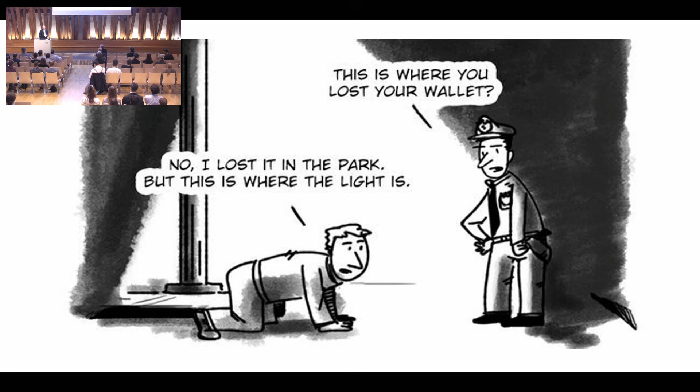And so, here's another cartoon. I'm looking for my quarter I dropped. Did you drop it here? No, I dropped it 2 blocks down the street. Why are you looking for it here? Because the light is better here. And so the architects, engineers, and geometers have different street lights. And I wish I could see what you guys see, and I want you to see what I see. And somehow can we get these knowledge bases closer to each other?

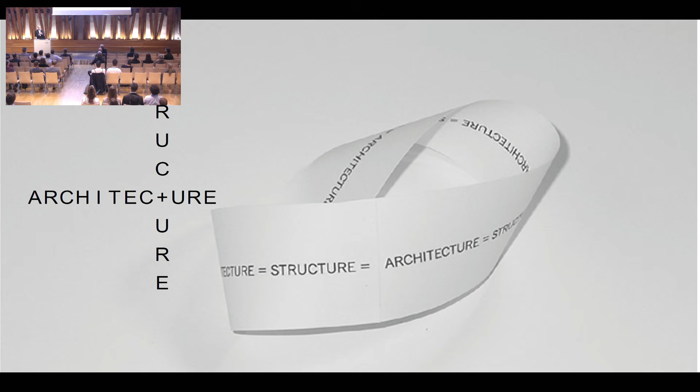Now, let me talk about structure and architecture. In fact, this room, if someone asked you to describe the architecture, you would describe the structure. If someone asked you to describe the structure of this room, you would have described the architecture. They're inseparable. And it's like a Mobius strip, another geometric form. You start on one side and you end up on the other. Architecture, structure, one would hope that they would go together. They don't always, but one would hope they would.

The building that I showed earlier, you cannot describe the structure without describing the architecture. They're integral. There's a building I did a long time ago in London. If you ever take a train out of Liverpool Street Station going up to Cambridge, you go under this building. It's a building that's a bridge because it's going over a train yard that's underneath.

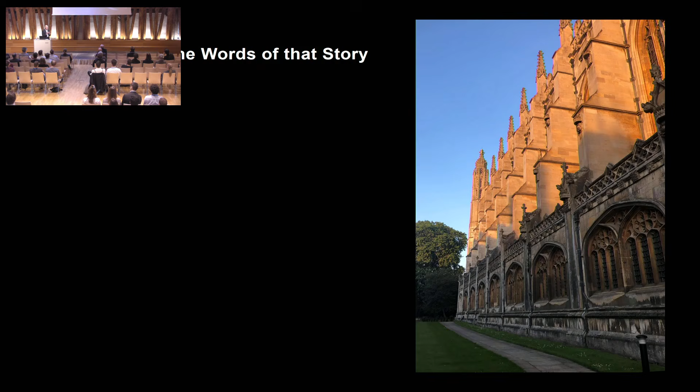Now, architecture is a story of a place and time, like this room we're in right now, or the chapel at King's College in Cambridge. So architecture tells the story of a time and place, but structure forms the words of the story. Here it's the flying buttresses, or this incredible fan vault that's in the chapel, that's held together by geometry. There is no reinforcement, there's no rebar, this is all just stone. The only reason it does not fall down is that it has the right geometry.

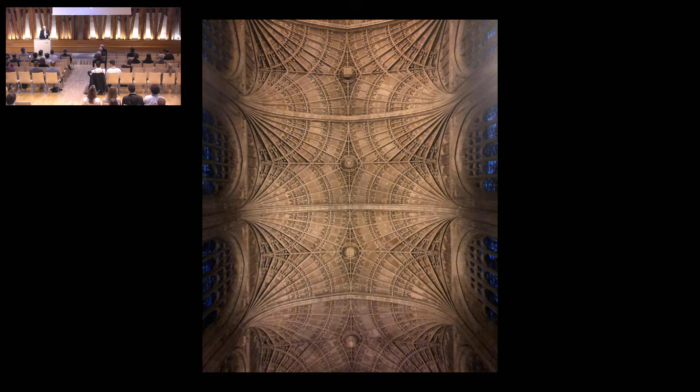And in some places it's only 100 millimeters thick, held together by geometry and gravity. And I challenge most structural engineers today to be able to design this that was done 500 years ago, because we don't know enough about geometry.

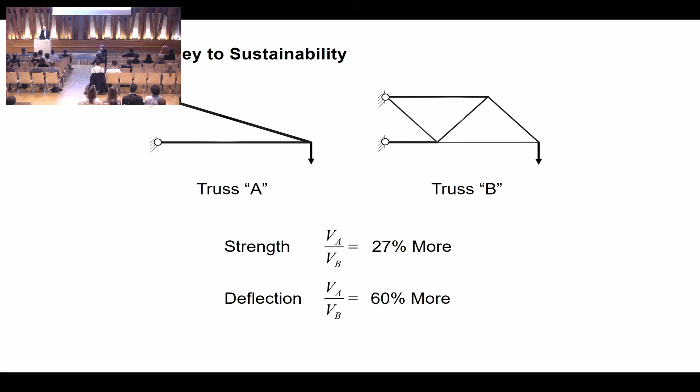Now, we're in the middle of this terrible climate crisis, and everything we build today delivers carbon to the atmosphere now. And in a new building, the embodied carbon is primarily structure. If you count the substructure and the superstructure, it's way up there, close to two-thirds of the carbon on a building on day one comes from structure. So we should get some very, very efficient structures when we build new buildings.

Okay, I'm going to use a little terminology. In the office, as Helmut says, we have our research group. And our research group is not a standalone research group. They are all people, architects and engineers, who work on projects as their day job. And then after hours, we think about things we don't know and do research. And it's so much more efficient to have the research done by people who are actually working on projects, because they will find applications that you never imagined.

Most of our research is totally blue sky. We generally do not have any idea what we're going to do with the knowledge we're looking for, but we will find applications because we are designers. And one of the things that happened early on is we would talk to each other and we didn't understand, because we were using the same word to mean different things. So I'm going to give a little terminology that we use in the office, and it may not be right for you guys, but okay.

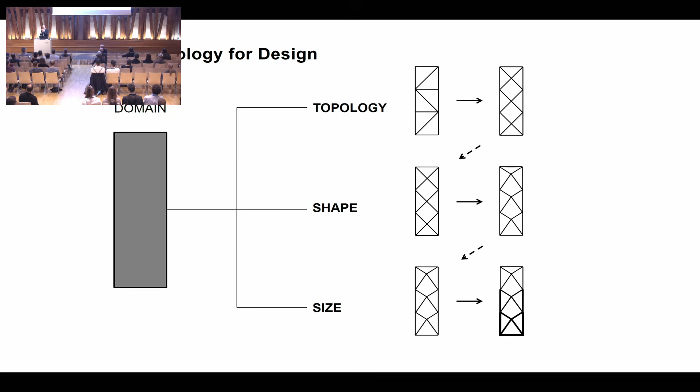You know that structure I showed you just a minute ago, the A and B? I don't care how good you're going to be at sizing the members or the connections, you cannot get beyond a bad geometry. And so the most important parameters are topology and shape, which is architecture. So the architects and geometers need to be involved in the creation of topology and shape.

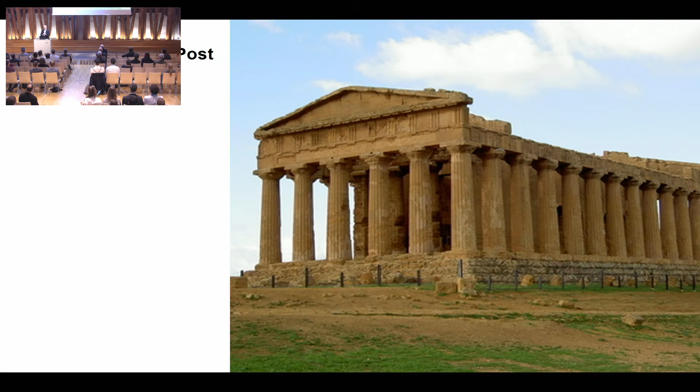And over time, structural technology leads to new architecture. So can we do what people have done in the past? If you go back to the Mayans, they had a very limited structural technology. They had the corbel arch. Well, guess what? Their architecture was pretty limited. The Greeks had a very limited vocabulary. They did really well with just a beam and post, a pretty remarkable architecture for a very limited vocabulary.

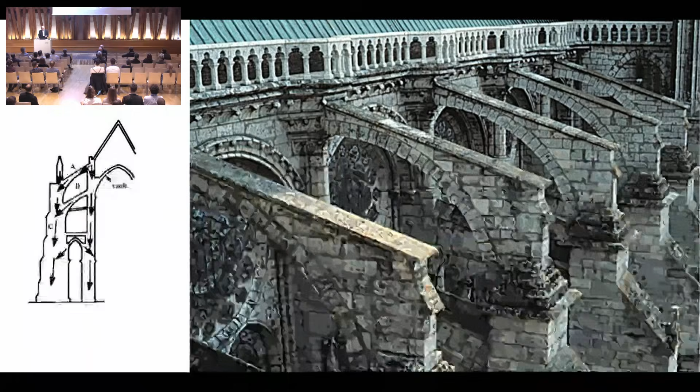The Romans, of course, brought in a richer structural vocabulary in the form of arches and domes, which created the opportunities for new and better architecture. The Gothic era was a highlight period of structure and architecture and geometry coming together. The thrust of that building has to be in the masonry, or the masonry would fall down. It cannot be anywhere else.

Now you go into the beginning of the modern era when metals came along, and you have the work of Thomas Telford in the early 19th century, or Brunel towards the middle of the 19th century, or towards the end of that 19th century, the work of Guastavino and others who created these incredible vaults that are just purely very efficient compression structures created by their own geometry.

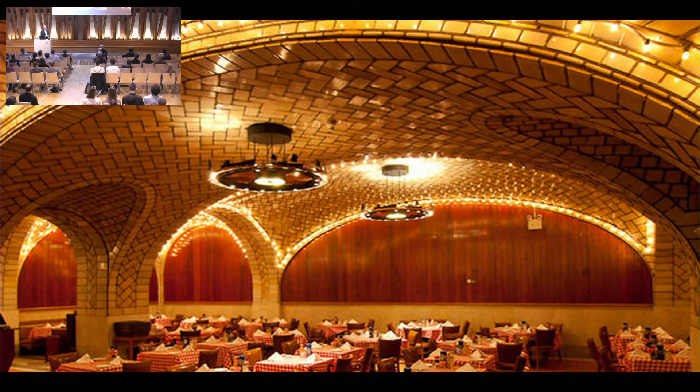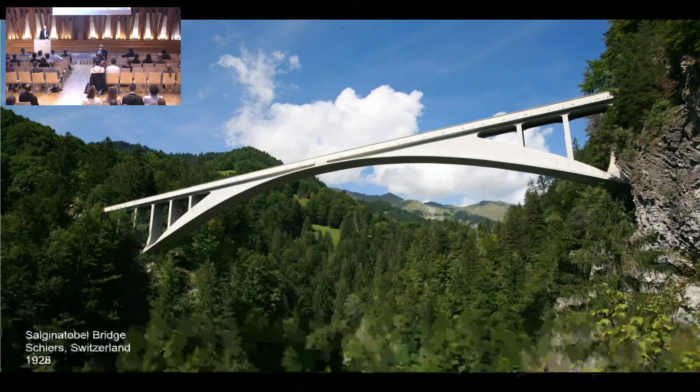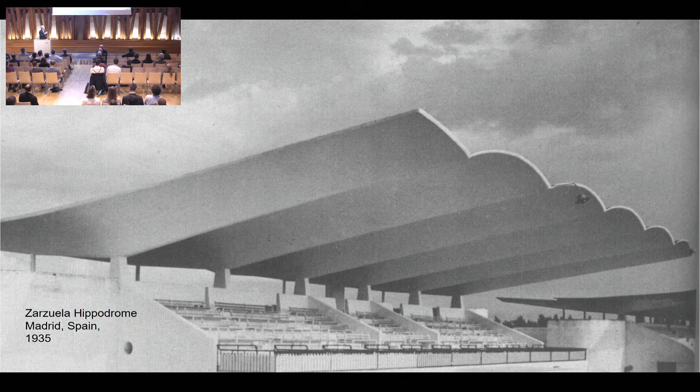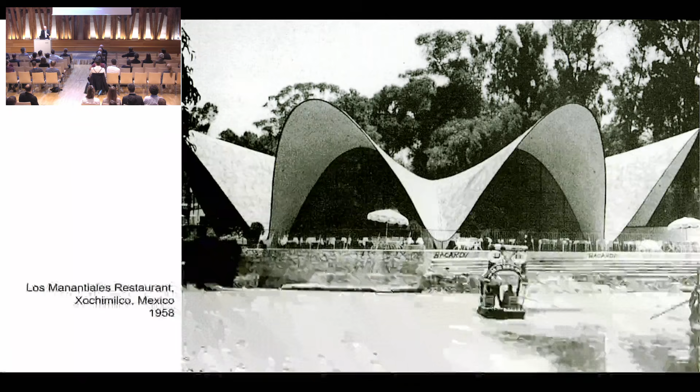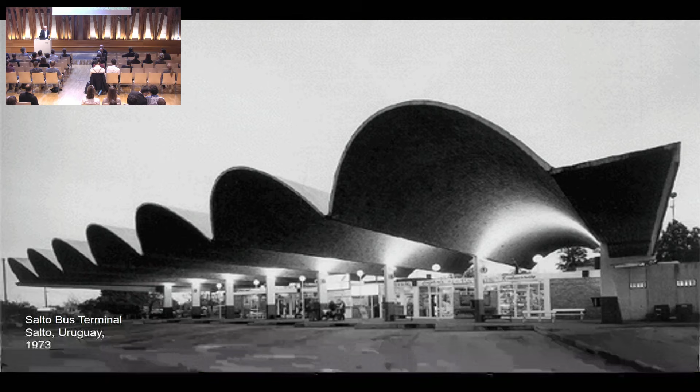Or Felix Candela, who did amazing things with a very limited vocabulary of hyperbolic paraboloids. That's incredible. Look how beautiful and slender that is from this hyperbolic paraboloid. Or Bucky Fuller with his geodesic domes. Heinz Isler with his free-form shell structures formed by hanging burlap and hanging fabric and seeing what the shape is. Or Dieste, this is a bus terminal in Uruguay. It's brick. That is brick that he post-tensioned together.

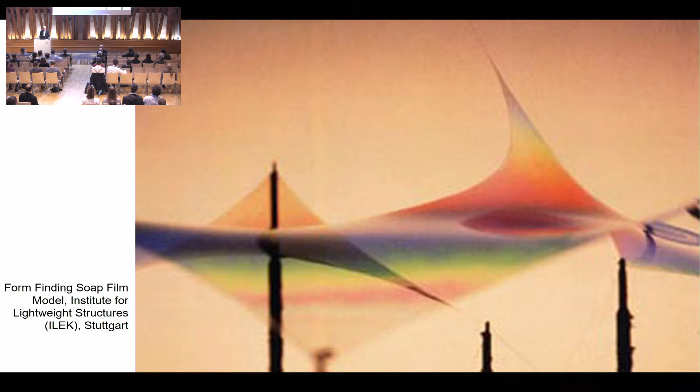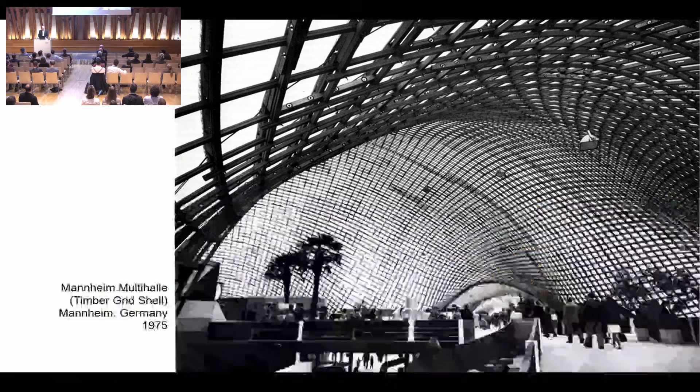Quite remarkable. Of course, the work of Frei Otto with his research down in Stuttgart, with soap films and other materials that led to the incredible new architecture of the Olympic Stadium or the Multihalle in Mannheim. Incredible structures.

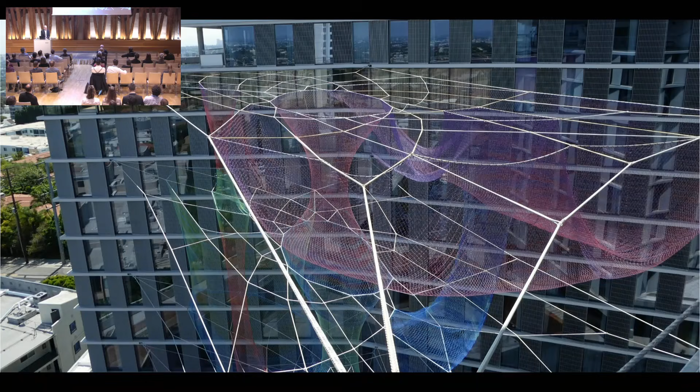Here's an artist that I work with quite a bit now. Her name is Janet Echelman, and this is an art piece we did in West Hollywood, California. And you look at that geometry, and even more so than the masonry, where is the force? It has to be in the rope. And for every node there that you see with your eyes of the ropes coming together, there's an invisible but equally real polygon of forces that are closing for it to be in equilibrium. And so that brings me to the geometry of equilibrium, a very, very important topic. All of these things I've showed you are based on the geometry of equilibrium.

And a very important contributor to this conversation was James Clerk Maxwell. Now, Maxwell is most famous for his work in electromagnetic theory. When Einstein first went to England, they asked him, did you stand on the shoulders of Newton? He said, no, I stood on the shoulders of Maxwell. But he also did some very important work in engineering mechanics, or essentially structural engineering. And he's responsible for something called reciprocal figures and graphic statics.

Here is his paper from 1864. The title is On Reciprocal Figures and Diagrams of Forces. Okay? And he talks about what is a reciprocal figure. Reciprocal figures are such that the properties of the first relative to the second are the same as those of the second relative to the first. Okay, now we're going to get into the stuff that I had no idea what he was saying initially. Thus, inverse figures and polar reciprocals are instances of two different kinds of reciprocity. I had no idea what a polar reciprocal was when I first read this.

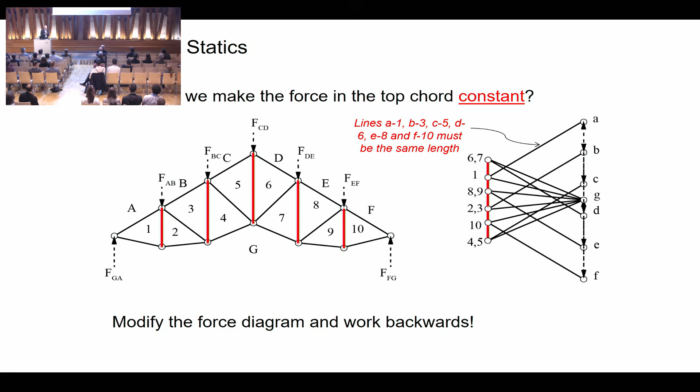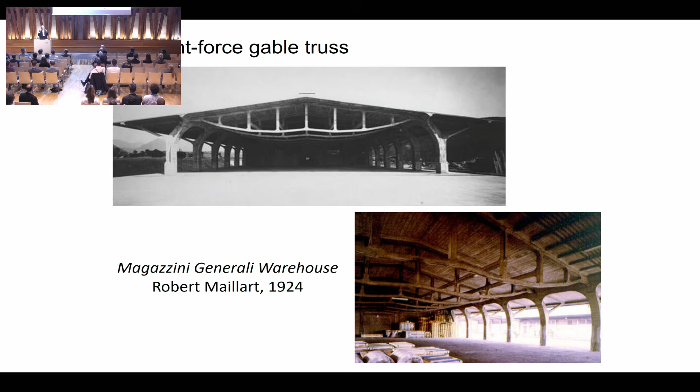Well, obviously you have to change the rest of the geometry to make this true. So you complete the geometry. Ta-da. You now have a structure where all of the forces in the top chord are equal. That looks a little unusual, right? Well, guess what? Maillart did it about 98 years ago, down in Switzerland. He designed this so that roof beam had a constant force. And you see that in the architecture.

Now, let me talk a little bit about the geometry of efficiency, something called Michell trusses. Once again, I was not educated in what a Michell truss is. I was at a conference once in Belgium, and one of the presenters says, this is like a Michell truss. I'm a structural engineer, I'm a partner in a big firm. I don't know what a Michell truss is. So when I got back to the office, I had the librarian find Michell's original paper.

And here is Michell. He was an engineer, mathematician. He was educated at Cambridge University, but he practiced in Australia. And he wrote an important paper in 1904, called The Limits of Economy of Material in Frame Structures, which means trusses. He developed geometries that would lead to structures of maximum stiffness or minimum volume for a given stiffness. And the first word of his paper is Maxwell.

And the first equation is the Maxwell load path theorem, which could be an entirely separate lecture. It's become one of my two most favorite design tools. My two most favorite design tools are virtual work and the Maxwell load path theorem.

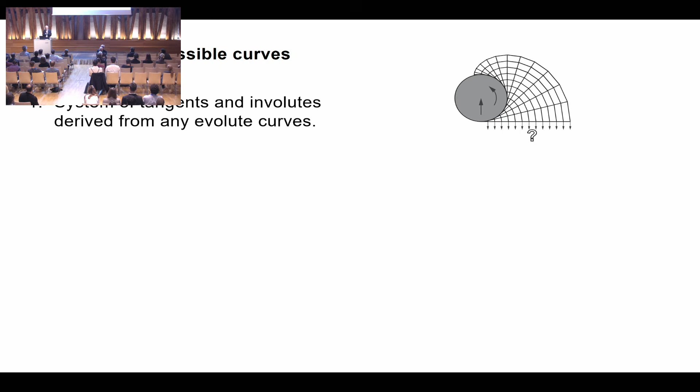And if you look at Mohr's circle, that tells you they should be 90 degrees to each other. And so you end up with these fields of 90-degree curves. Another one he comes up with is the logarithmic spiral. Now, what's interesting to me is geometrically, Michell implies that he feels that this is the most general geometry because by playing with the equiangular spiral or logarithmic spiral, you can go to polar coordinates, or if you zoom in on one of the nodes, locally it looks like rectangular coordinates.

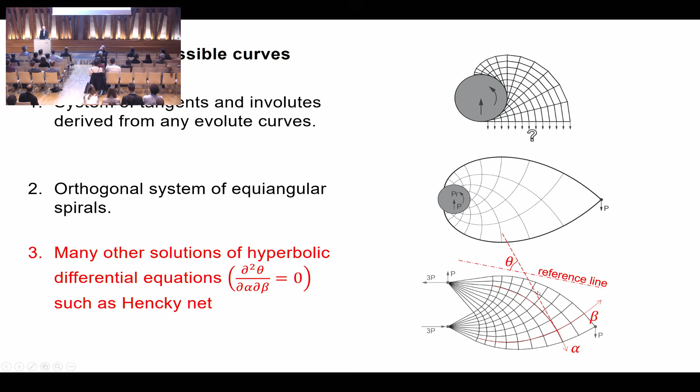Or these things called Hencky nets, which basically is saying that this cross partial derivative of the change in the angle to a reference line going in one direction and then back to the other direction is equal to 0. And this is very, very important. And it led to the following structures. These are Michell's trusses. These are structures of least volume.

The one on the left, if you have a semi-infinite space where you can only have structure below the line, you can't have structure above the line. So here's a downward force, and the reaction upward. You will notice that the force in this rim, this thing that looks like half a bicycle wheel, never changes. This compression member is always orthogonal to the tension members, and all the tension members are turning the load. And so what I think nature, because this is physics, is trying to tell us is that nature likes to turn loads gently.

Let's look at this odd-looking cantilever structure here, where there's a circular support here in the middle. There's an applied load out here, and you have these logarithmic spirals. And you'll notice that the force in this chord never changes all the way to the support. Nature is turning the load gently.

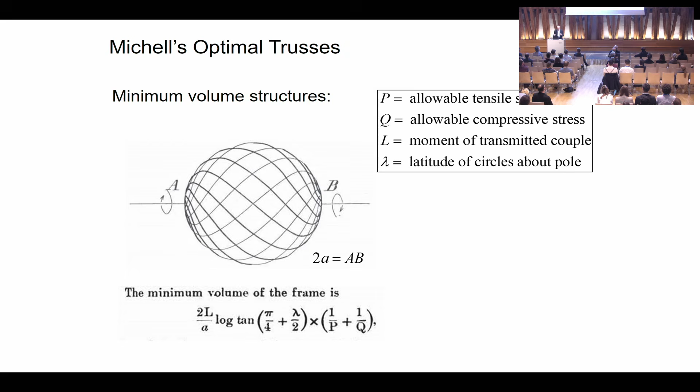So in architecture geometry, you tend to see these three primal geometries. You tend to see orthogonal tension and compression fields, or polar, or logarithmic spirals, or combinations of those. So here is a combination of orthogonal and polar that are minimum load path structures.

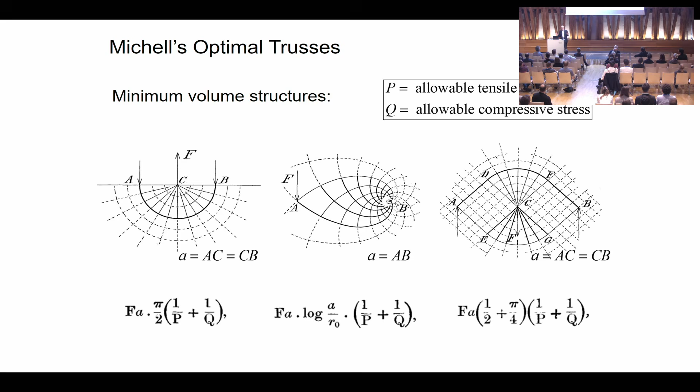Now, one of the things I want to point out here: in this structure, there are an infinite number of spokes. In this structure here, there's an infinite number of members in there. Well, it's pretty hard to specify that on a drawing, okay? I want an infinite number of spokes, okay? So we live in the world of discrete, and so we've been doing a lot of research into something we call discrete optimal trusses. One of the engineers in the office, Arek Mazurek, did this research.

So here we have this truss, which has a geometry somewhat like the Michell truss, and it has a certain span, x. We're going to keep it symmetrical, so we know y1 is 0. You're not going to move these nodes. Y3 is going to be 0 because we're going to keep it symmetric. And x3, well, we fix the length. But this node can move in the X or Y direction. So we only have 3 variables to find the geometry.

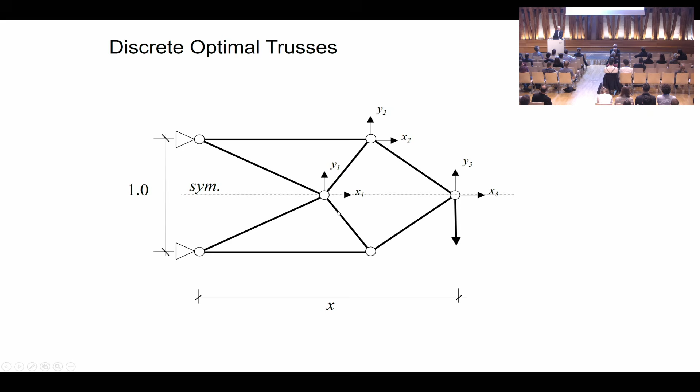And remember how I said that the compression member and the tension members want to intersect at 90 degrees? Well, you can do that if you have an infinite number of members, but if you have only a limited number, how's it going to work? So our first guess was that this member would bisect these two, but guess what? We were wrong, okay? And I'm going to show you his research.

Look at the geometry. There's going to be some instability at the beginning because there's actually a better geometry, but at a certain point it'll stabilize, and then as it goes to different lengths, look at the geometry and see if you can figure out what the rules are. There are certain geometric rules that nature is trying to tell us. Certain geometric relationships.

And what Arik observed is this: that nature keeps one of the angles at 90 degrees and throws the error into the other angle. And so these offsetting angles are two 90s, and for the geometers in the room, they add to 180 degrees, which tells you something about this quadrilateral, okay? Some very special things. And that this angle equals that angle, equals this angle, equals that angle. They were all the same.

Nature is amazingly organized and regular. You just have to look for it. And I'm going to talk about this again at the end. For me, the why is much more important than the what. This tells me what the answer is, but I want to know why is that the answer? Because if I understand the why, I can do more than just knowing what the answer is.

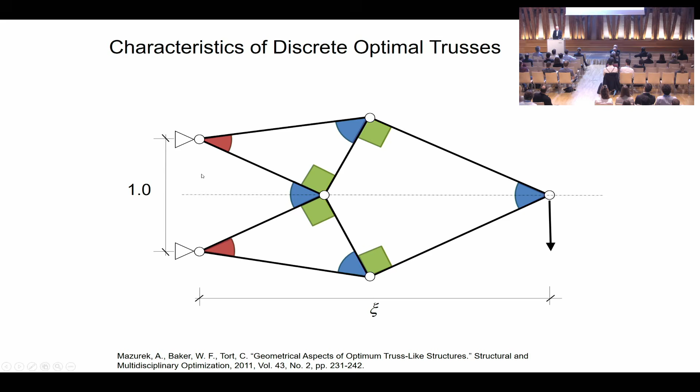And so you can describe this geometry with only one angle and knowing the other geometric rules, that these offsetting angles have to be 90 degrees. So if I guess this angle, I know these angles, I can figure out this entire geometry. And so here is a discrete optimal truss that can be described with only one angle, this angle alpha, plus the rules that the offsetting angles have to be 90 degrees.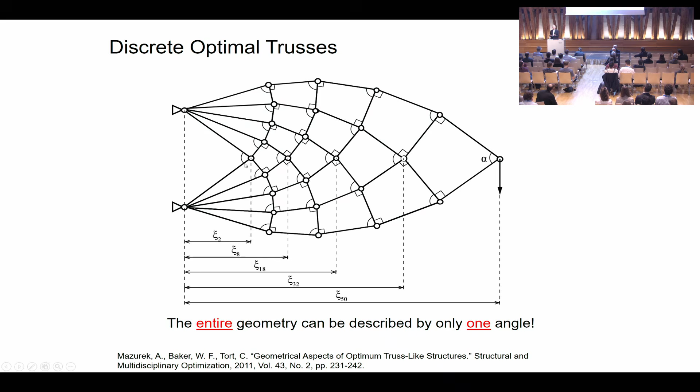And so this is a minimum load path, 50 element truss. Inside there is another optimal structure which has only 32 members, and inside that one is an 18 member, and then an 8 member, and then a 2 member. So it's a series of nested optimal trusses, which is quite remarkable.

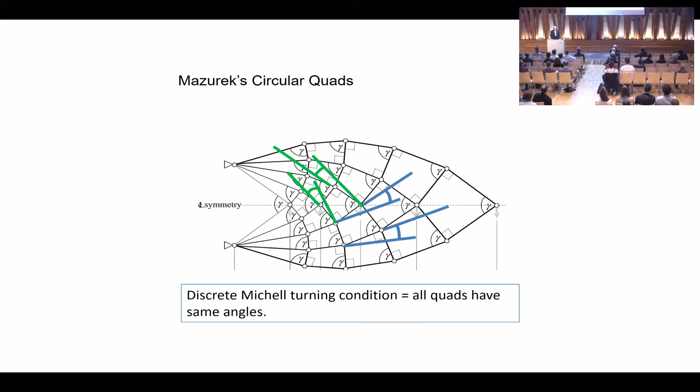And because of those geometric rules, it actually follows what Michell described. The turning angles are the same. All quads have the same turning angles, and each quad can be inscribed in a circle. Okay, that's the what. Why? Okay, we'll get to that in a minute.

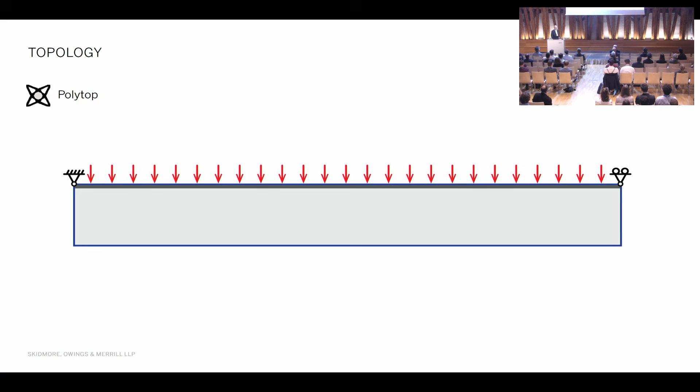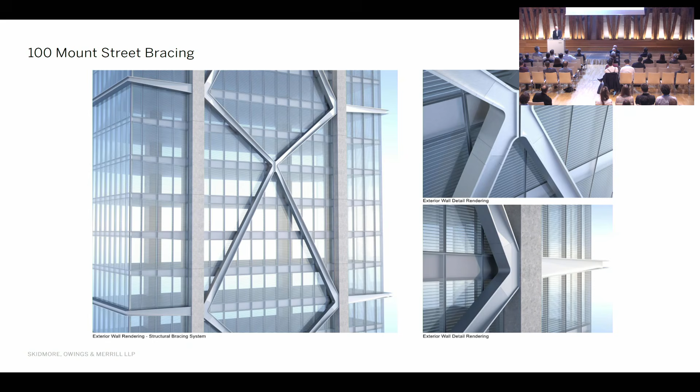And we've used that on design of tall buildings, and we find this high-waisted X is more efficient than the traditional X. It wants to be about at the three-quarter point, and this is about turning the loads gently. There's a sweet spot where the wind comes in, it turns 30 degrees, it hits the middle, it turns another 30 degrees, it hits the far side of the building, turns another 30 degrees and goes vertically. You have to match the floor lines, but in general, this would be a 30, 60, 90 triangle.

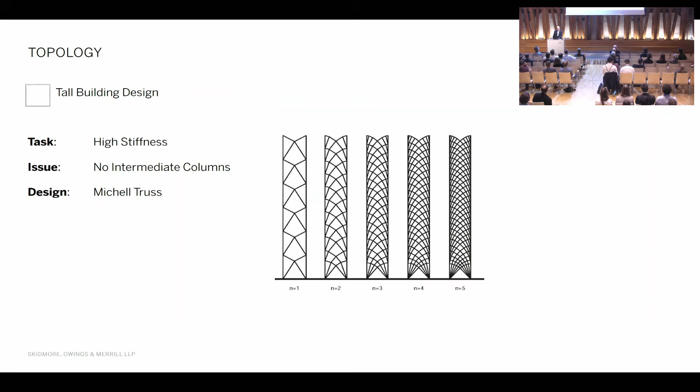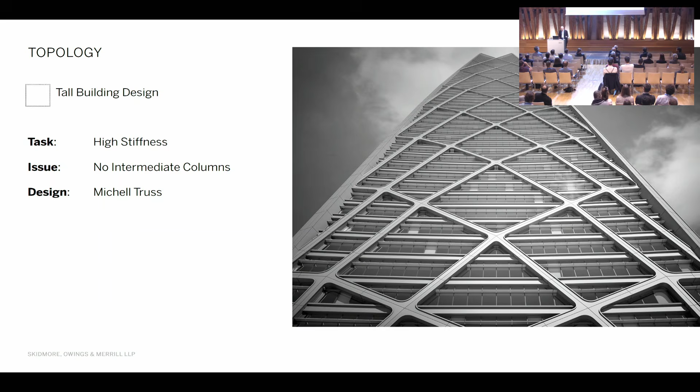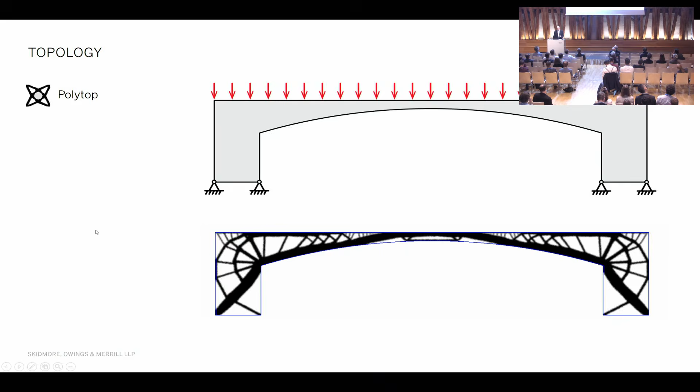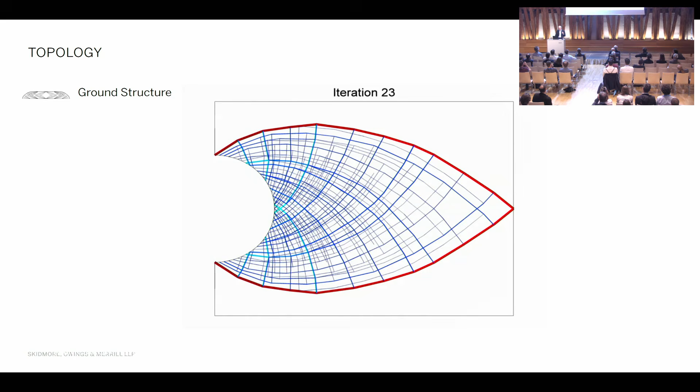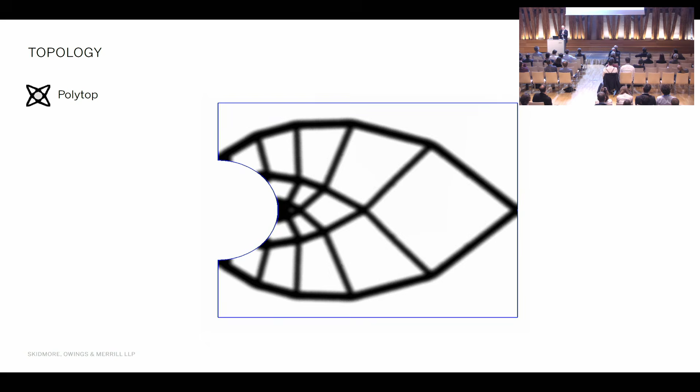And so what we like to do is use multiple tools and see what ideas they give us. So we can also do the same problem using that PolyTop program. And here, it is like an ultrasound. We're growing the structure. We're moving it around until we solidify it. And you can see it's very similar to the other solution, but not the same, because the tools will give you different information. And you change the penalty function, and eventually it comes in very crisp.

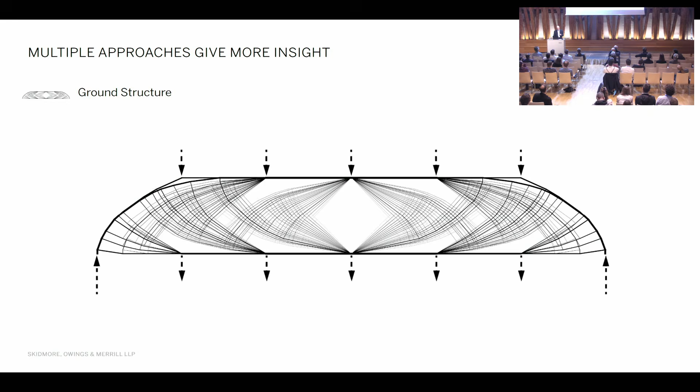And so here's a design problem I was working on. I use this tool, and then I use this tool, and I look at them. I get a cup of coffee, get some trace paper, come up with this. Okay? Well, how good is it? Well, I can compare it to this structure, which you're never going to build, too complicated. For the same deflection, it's within 5%. I only have 5% more material.

That's pretty efficient. If I did the traditional Pratt truss, the Pratt truss has 68% more material. I've almost stopped ever using Pratt trusses anymore, okay? Because you carry the load too much. And this goes back to the load path theorem lecture I could give some other time.

Okay, let's go to higher dimensions. We got a two-dimensional structure. Now, we're going to talk about something called the Airy stress function, which is related to the equilibrium of trusses. Also came to Maxwell. So here is this structure, the form diagram and the force diagram, and here are these little dashed lines. What are they? It turns out, for this to be in equilibrium, it has to be a projection, are you ready, of a plane-faced polyhedron. What?

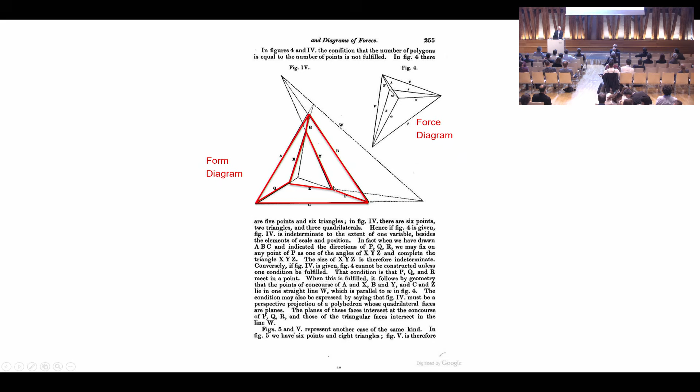Maxwell says that hence the conditions of the possibility of reciprocity in plane figures is the same, each figure being a perspective projection of a plane-sided polyhedron. You cannot do graphic statics unless your structure is in equilibrium, and if it's in equilibrium, it's a projection of a plane-faced polyhedron.

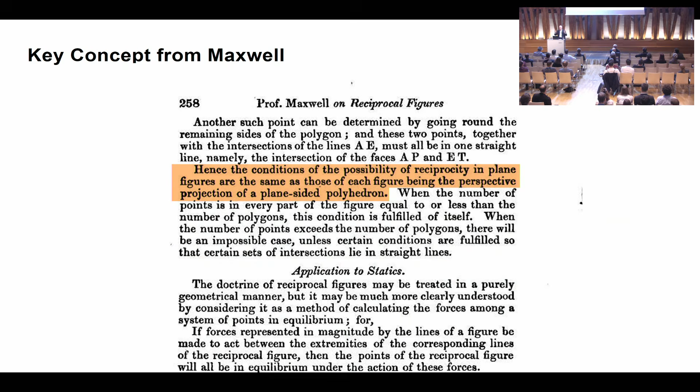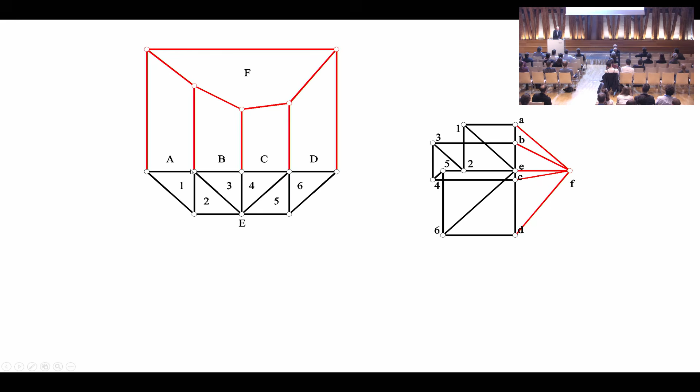Here's that structure we looked at earlier. I'm going to do a little trick you learned from Rankine. Put a pole out here, and I get this funicular structure, and I move it up there, and now I have a self-stressed structure. If I know the force in one of these bars, I know the force in all the bars, and so this black truss has exactly the same force as it did before.

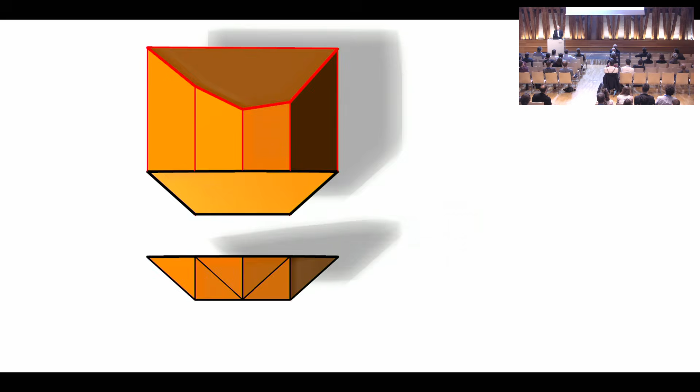Guess what? It is a projection of a plane-faced polyhedron, where every face is exactly flat. All the ridges are compression members, all the valleys are tension members. Exactly flat. If you have moments, then the panels won't be exactly flat. But this is purely geometry. Equilibrium is geometric not only in 2D, but in a third dimension.

And as you geometers know, every polyhedron has a reciprocal polyhedron. And if you use the Maxwell paraboloid of revolution, every face maps to a point, every point maps to a face, every edge to an edge. There is the reciprocal polyhedron, and it projects down to the forces. This is purely geometric at this incredible complexity, that these two-dimensional structures are projections of three-dimensional polyhedrons.

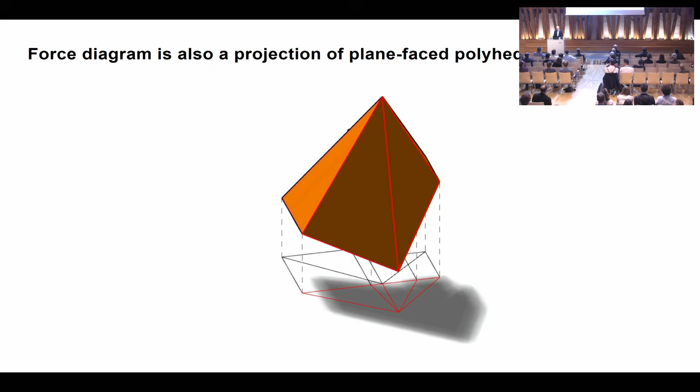Every face is exactly flat. So every node maps to a face, every edge maps to an edge, every face maps to a node. So what does that mean? That means that any plane-face polyhedron you make, and you project all the edges, you have the potential of a structure that's in equilibrium. So you could freeze that at any point, and you have a structure, an equilibrium geometry.

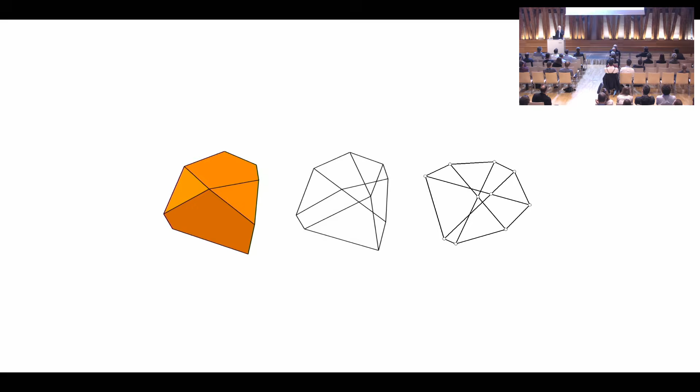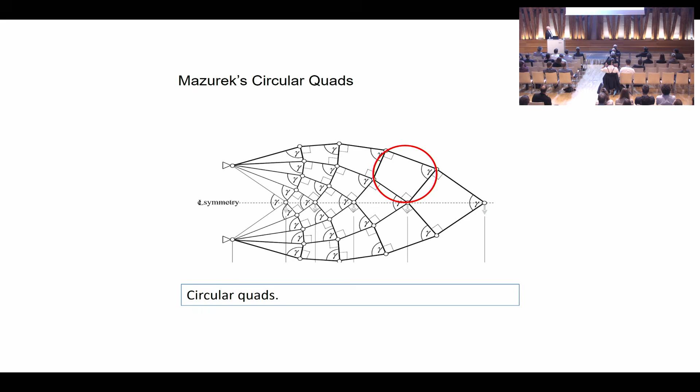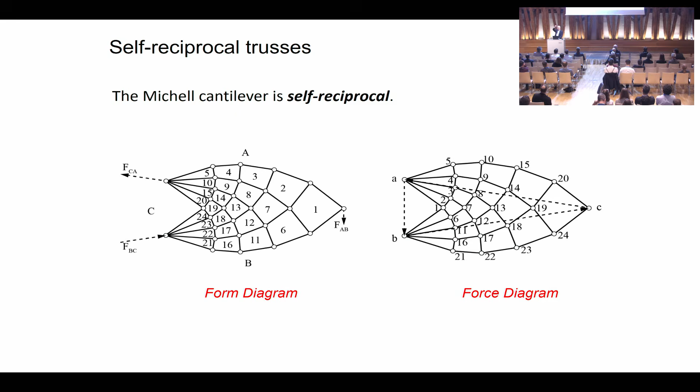So now I'm going to go back a little bit. Remember this annoying fact. Why is that on a circle? And remember we said graphic statics, where this polygon, remember both of these are projections of plane-face polyhedra. So this two-dimensional area is related to this node, and it's actually related to the Airy stress function, the polyhedron that's above that node. And Maxwell had this amazing thing where if you take the integral of the Gaussian curvature, it is equal to that area.

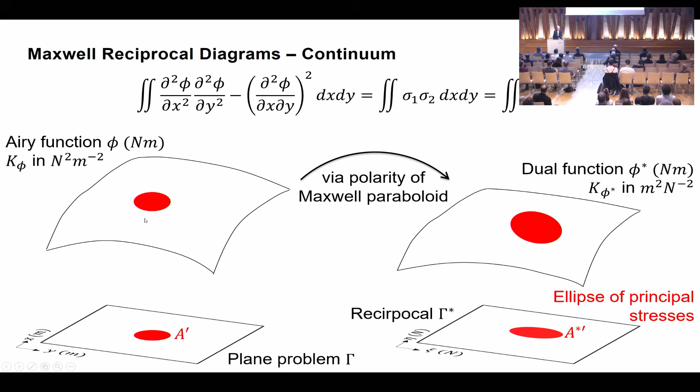So what does that mean? Okay, so here's a two-dimensional structure. There's the Airy stress function, and then there's the reciprocal Airy stress function that you map back down here. So it turns out that this area is the integral of the Gaussian curvature of the Airy stress function. How weird is that? Okay, and so this area down here, where's my cursor? This area here is a map of the angular deficit of the Airy stress function at this node.

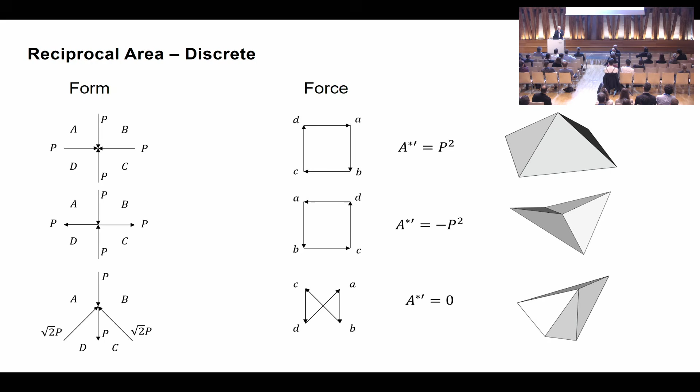Well, this is all interesting. Where do we go with that? Well, it turns out that your Airy stress function can have positive Gaussian curvature, it can have negative Gaussian curvature, it can have zero Gaussian curvature. Origami. Is it related to origami? Now, it turns out this is really useful, and we got this actually from Helmut, okay?

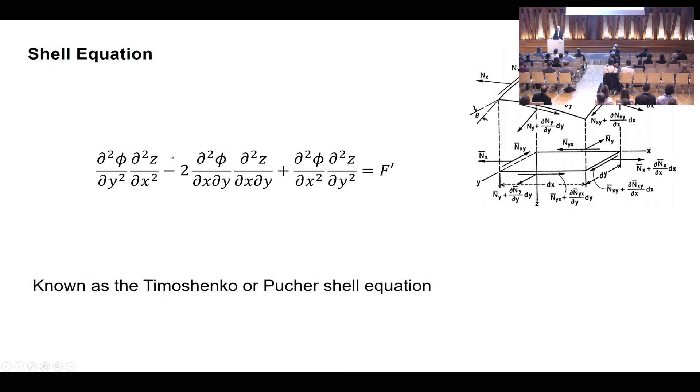So here is the equilibrium of a shell structure, okay? A shell structure is statically determinate. I have nothing in here. This is the equilibrium equation. It has nothing to do with material properties. Here is the curvature of the roof, which is Z, and the curvature of the Airy stress function, put together in these various ways. And so it turns out for every shell structure, you have two geometries. One is the structure, and the other is the Airy stress function.

And you can switch them. If this is the structure, I can look at the Airy stress function. And because I have no reverse curvature, I know that this shell is 100% in compression. Because the second derivative of this shape is always a constant number. It always has a positive Gaussian curvature.

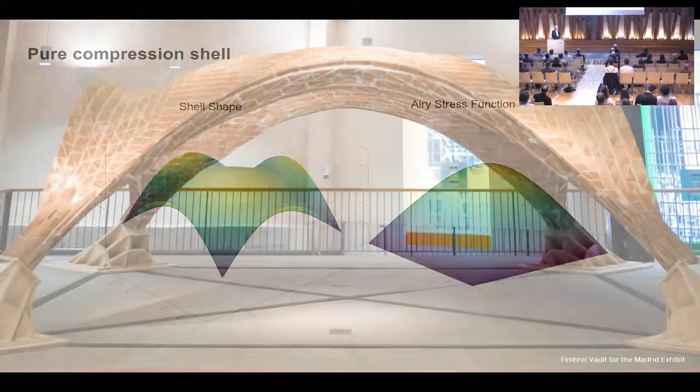Okay? Now, if this is the structure, you can see I have a reverse curvature. So if this is the structure, I have a bunch of tension right through here. That's caused by that reverse curvature. And so this is the shell that was built from that Airy stress function. Pure compression.

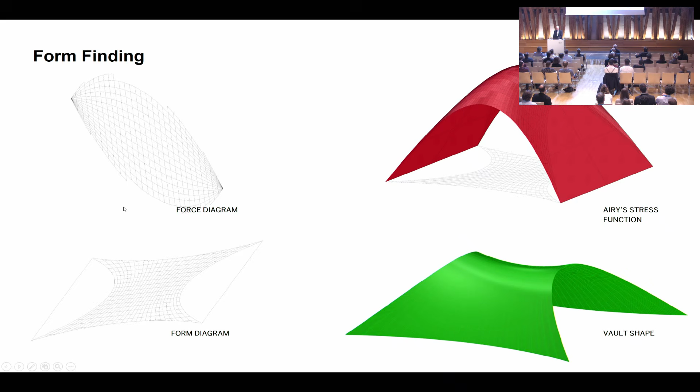We like to play around. So we designed this one structure where here you see the force diagram, the form diagram, the Airy stress function, and the vault itself. And we played around with patterns, and we decided to build it with a robot, since we have a robot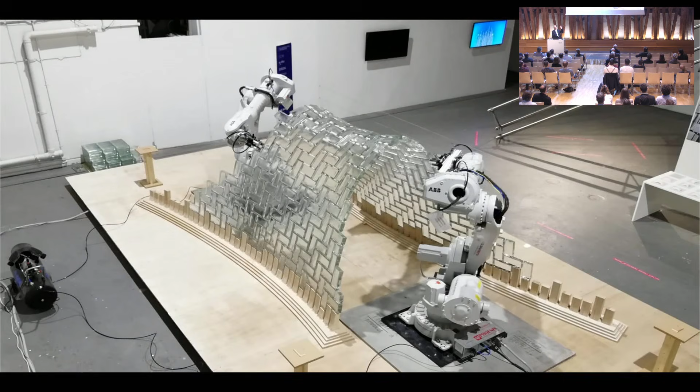speaker later. Anyway, so we did this like 2 years ago in London, then we got hit by the coronavirus, and we had to shut down. We actually didn't quite finish the vault before we were kicked out, but we got pretty far. And so this was designed with the Airy stress function.

And so for every roof, this roof, I think you got bending here, so whatever. But if this were a pure axial roof, there would be 2 mathematical functions for this roof. And that'd be a good master's thesis: calculate the Airy stress function for this roof. One is the structure, and the other is the Airy stress function. And you can choose which one you wish. So one of these is the roof. You choose. The other one is the Airy stress function.

And the forces, let's say this is the roof. See how there's a big angle change right here. That means there's a big compression thrust right here, because they map to each other. The one diagram tells you the forces in the other. If this were the structure on the right, you can see that the forces would be very, very smooth.

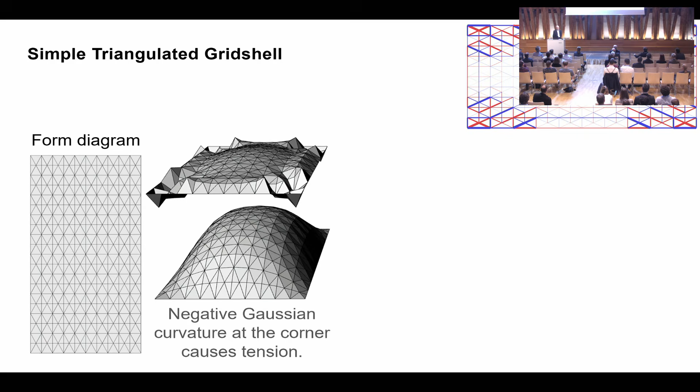Okay? And so what we do is, we play around, we guess a shape, and then we look at the Airy stress function. If somebody shows you this shape, you say, well, I guess it's okay. Then you look at the Airy stress function and say, well, that's not really very good, is it? And you can see it with your eyes. Is that blue-green? So you guess something else. Well, that's a little bit better, maybe.

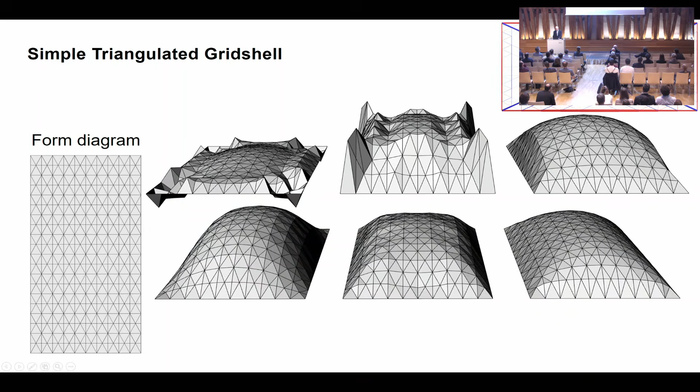Okay. And then we go to the mathematics of Chris Williams, and we look at electromagnetic theory and come up with a geometry. And look at this one. So this is the roof, and that's the Airy stress function. Much smoother, much happier structure.

And then we decided to put those 2 on a date. And so A and B went on a date, and they had C, okay? And it turns out C is a self-Airy. It is not only the structure, it's the Airy stress function. It's both. Okay? And here's the force diagram.

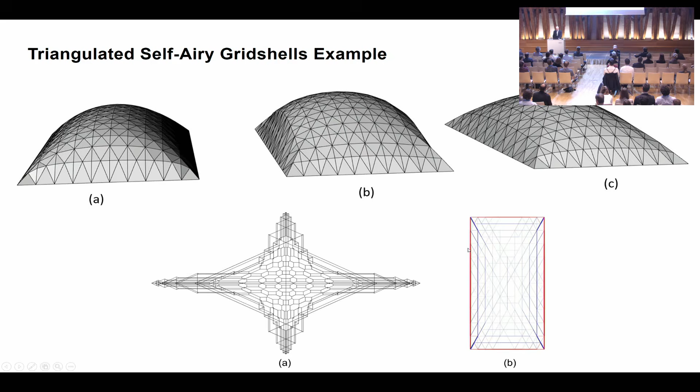Guess what? Every one of these quads has exactly the same area because it has constant isotropic curvature. And every octagon here has exactly the same area as every other octagon in this force diagram. Unbelievable.

Okay, got to bring it back here, right? Strubecker, okay? By the way, if somebody wants to translate his work into English, I would really appreciate it. All of his work is in German. So you cannot read about isotropic geometry in English because it doesn't exist, okay?

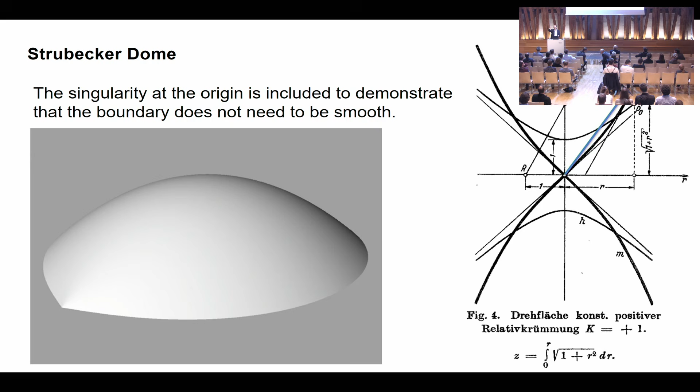And so, we were looking for a constant isotropic curvature roof shell, and so Helmut pointed to this one because we wanted something that was irregular. This is a self-Airy. This is both the structure and the Airy stress function. Quite remarkable.

Here's one of my favorite structures in the world, which I had absolutely nothing to do with. It was done by Foster and Partners, Buro Happold, local boys, Waagner-Biro. I'm sure most of the work was done here in Vienna on this one. And then Professor Chris Williams, a brilliant mathematician and engineer, who sponsored that conference not too long ago.

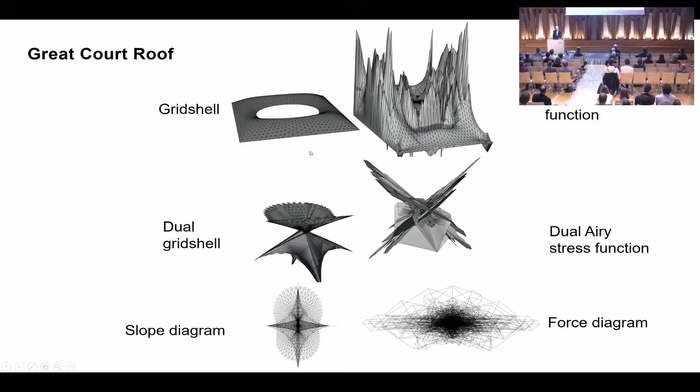And so here's the grid shell. Here's the Airy stress function, and here's the force diagram for that roof. So you could actually design that roof purely with geometry, only geometry, no finite element programs.

Okay, I'm going to quickly go to higher dimensions because I'm running out of time here. What about three-dimensional structures? Well, we're going to go to Rankine. And by the way, the title of my speech was ripped off from Rankine because when he got his Regius chair at Glasgow, he said, on the harmony of theory and practice, or something like that. And so that was the inspiration for my title today.

And this is his entire paper. I know of 2 PhD theses that have been done on this paper. It is 3 paragraphs, 4 sentences. Okay? He wrote it in January and it was published in February in the Royal Society, okay?

And he goes from 2 dimensions to 3 dimensions, where every node maps to a cell or a polyhedron, every edge to a face, which is perpendicular. The edge is perpendicular to the face, and so on. And so what you have is this reciprocity. One is the structure, the other is the forces, okay? Where every node maps to a cell or a volume, and every face maps to a line which is perpendicular to the face. And so the force in that bar is equal to the area of that face.

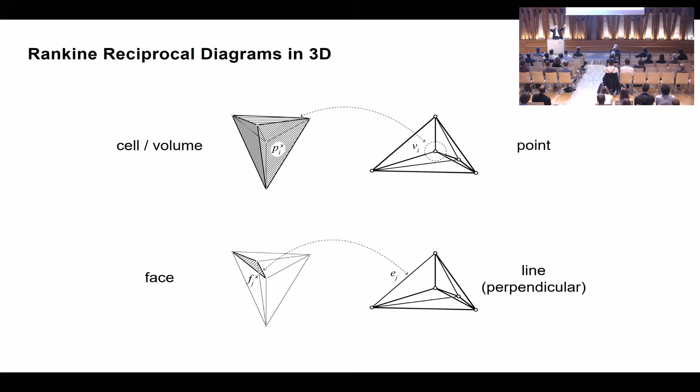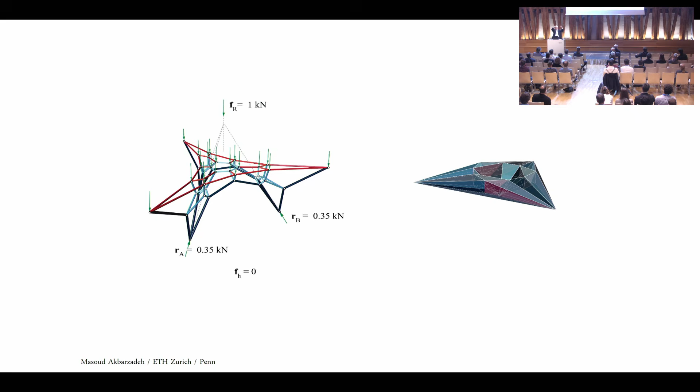And so 3D graphic statics. There's research, Masoud from the University of Pennsylvania is doing this research where you take a polyhedron and you subdivide it and you create these equilibrium geometries. Ta-da. Okay, that's from a 4-dimensional polyhedron.

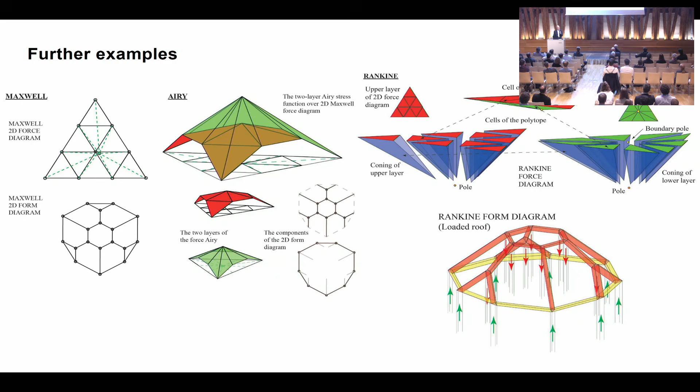Here's another example. Structure, not one finite element program is used. Totally done with only geometry, the geometry of equilibrium. You can also use geometry for mechanisms, static-kinematic duality. Both of these are projections of a plane face polyhedron.

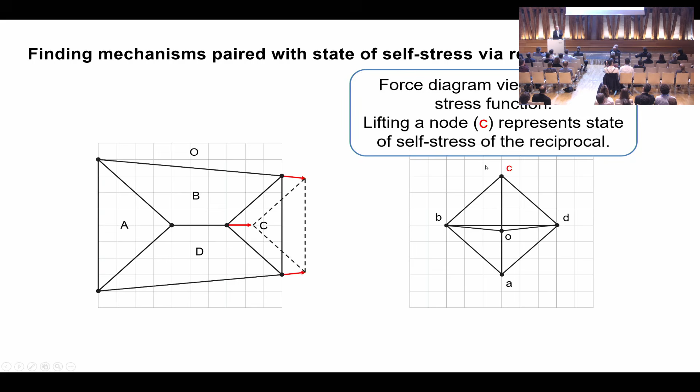If I move this node C up and down, what it does, it stretches, it's parallel redrawing, which it turns out if you rotate that 90 degrees, that's the mechanism. There's the relationship between equilibrium and mechanisms.

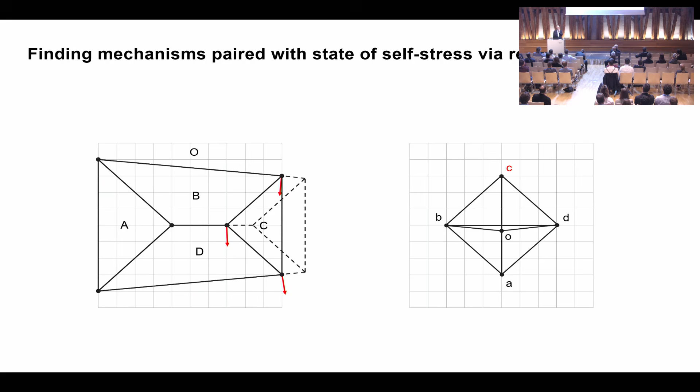Okay, I'm running over too much. Okay, so here we go. I'm to the end here.

This is to the architects, engineers in the room, and the geometers. Why is more important than what? You can get an answer, but why is it the answer? I think geometry will help us understand the why. Why is it the answer? Now, as an engineer, I was taught next to nothing in geometry, okay? Of course, you had calculus, and maybe you had differential geometry or something. But basically, I was never taught about projective geometry.

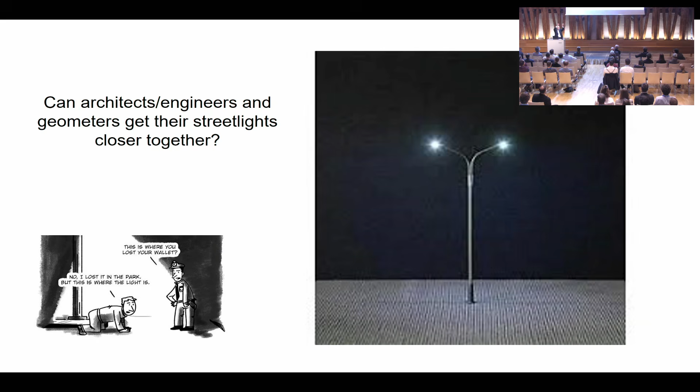And then when I read Maxwell, I try to figure out, where did he get that? I always look to Euclid, because back then, everyone had to memorize all Euclid. And so there you had it. So can architects and engineers get together, can we get our street lights closer to each other so that I can see what you see and you can see what I see? With that, thank you.